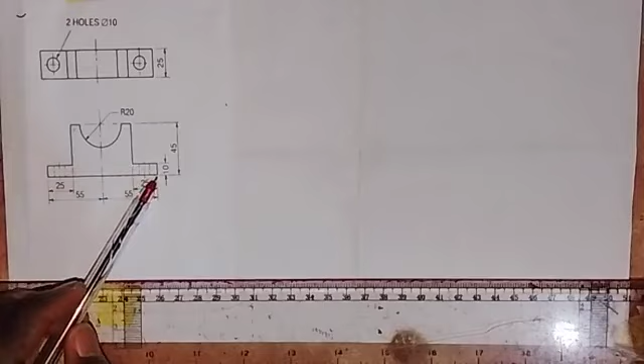This is the front elevation and this is the plan or top view. On the front elevation, the distance from here to here is 25 millimeters, and the distance of this end from the center of the semicircle is 55 millimeters. Also from here to here is 55 millimeters, and from here to here is 25 millimeters. The thickness from here to here is 10, and the height from here to here is 45 millimeters. The radius of this semicircle is 20 millimeters.

Then for the top view or plan, from here to here is 25 millimeters, and the diameter of these two holes is 10 millimeters. We are going to make use of these dimensions to produce the isometric view of this object.

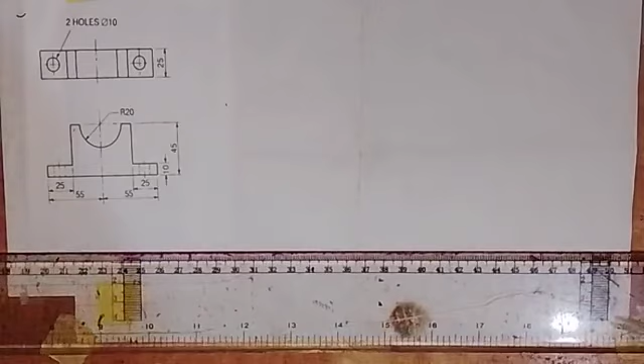Now, the lowest point is not indicated here in the drawing, but I'm going to take this point as the lowest point. So let's go and see how this construction can be done for us to make the isometric view of this object.

So we draw a short horizontal line here. Then I'll take my 30-degree set square, setting it at this point, and draw a line in this direction. I'll draw a line in this direction, and indicate the lowest point. So I'm going to put A at this point here.

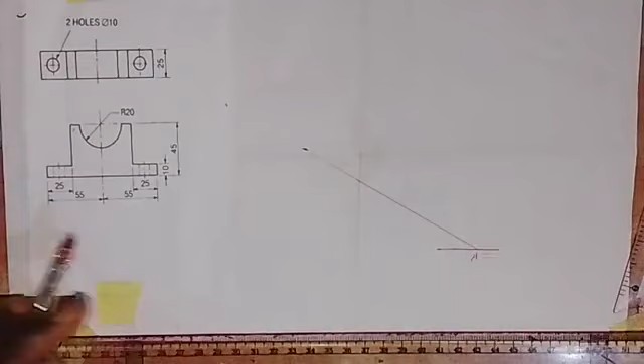So what I want to do first is produce the isometric view of this front elevation. Once you are able to do that, the rest of the object will come out easily, as you're going to see me doing it here.

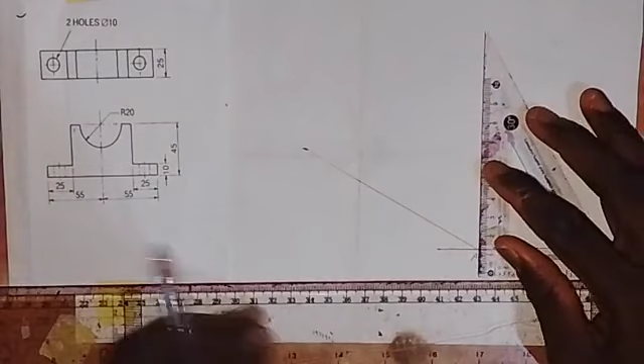Now, at this point A, I'm going to draw a short vertical line. Then I'll take a measurement of 55 millimeters, that is from this point to this center. So from this point, here I have 55 millimeters.

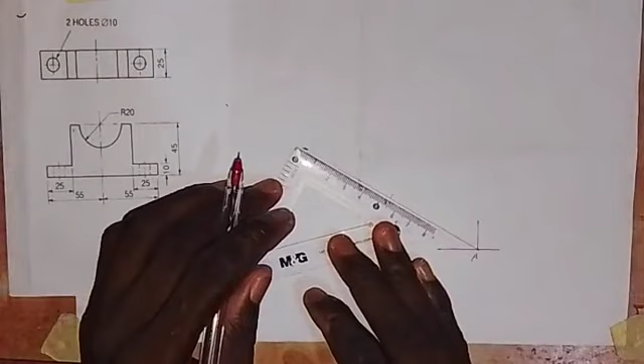Then I will move from here also and take a measurement of 55 millimeters. So this is 55 millimeters. At this point, I'm going to erect a vertical line. This particular one is a center line as we see it in the given view. While here, I'm going to draw a short vertical line.

Then again, I'm going to take a measurement of 25 millimeters that we have here, and also 25 millimeters here. So I come to this point and take a measurement of 25 millimeters from this point to this side - that's 25 millimeters. I'll come to this end here and also take 25 millimeters to this side - that's 25 millimeters here.

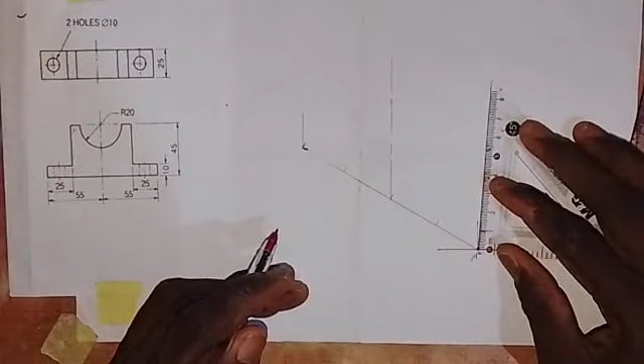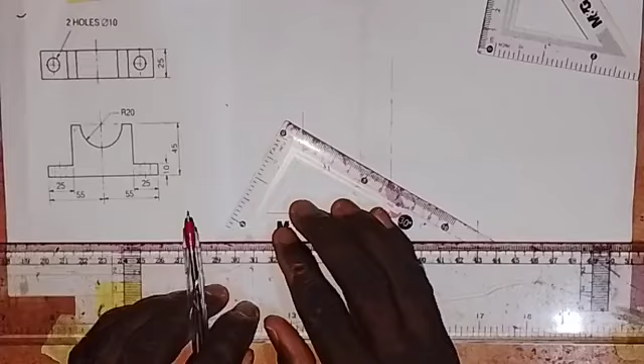Then on this line, I will take a measurement of 10 millimeters, that's the thickness from here to here. So this is 10 millimeters. I'll come to this point, or first draw this line of 10 millimeters in this direction, and with the same 30-degree set square, come to this end and draw a line in this direction.

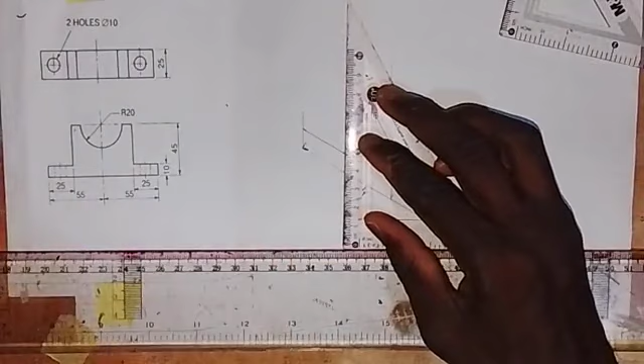Then I need to extend this one a little bit forward. Then from this point, I'm going to draw a vertical line - not from here, but taking it from this line up. And I'll come to this point also and draw a vertical line up like this. Okay, we have this now.

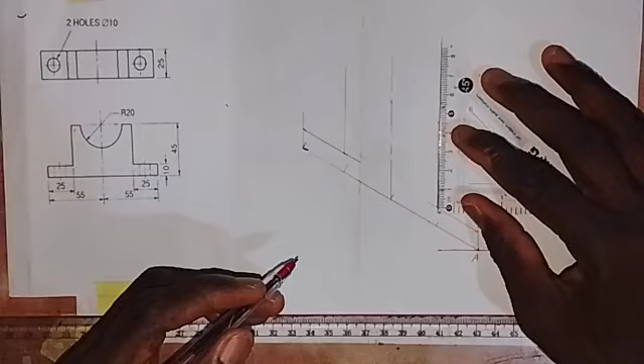So the next thing we are going to do is take a measurement - from here to here is 10, which we have already taken. Then if we subtract 10 from 45, the balance is 35. So I will take a measurement of 35 millimeters from this point up - this is 35 millimeters. Then I'm going to draw a line from here, a center line.

So from this point where we have taken that 35, I'll draw a center line to this side like this. All right, so we have this now.

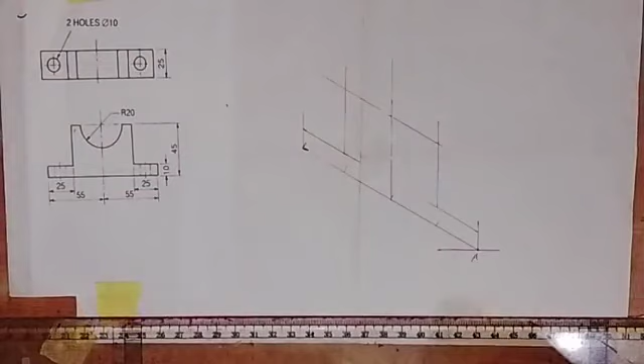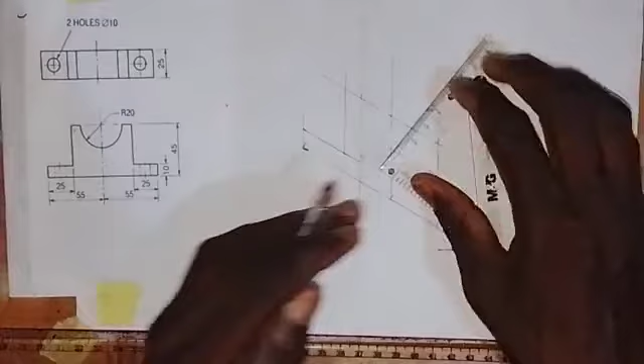Now we are going to create this semicircle here on this face, and the radius is 20. So we are going to take a measurement of 20 millimeters from this center, taking 20 millimeters to the left side and 20 millimeters to the right side, making 40. Then I will come here at this center, setting my ruler like this, take 20 millimeters down, and then take 20 millimeters up.

So on this face, I'm going to create an isometric square so that I can bring out this semicircle. I'm going to draw a line from this point to this side, then come up here and also draw a line with the 30 degree set square in this direction. Then from this point here, where we have this 20, I'm going to erect a vertical line, and also draw a vertical line here like this.

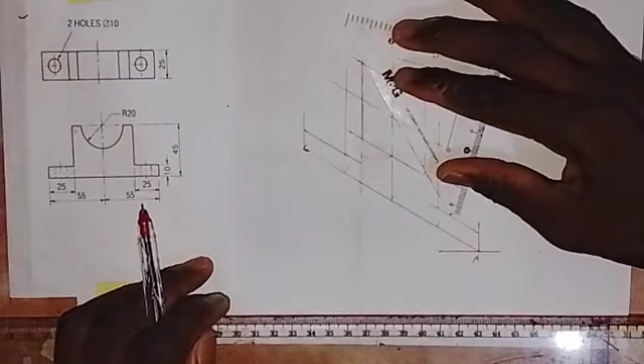So with what we have here, we are going to join the longest corners together with a straight line like this. So we join them together, and now we have this.

Then the next thing that I'm going to do is draw a line from this point, connecting this point to this point together like this. Okay, so we have this. So this is all that I need to do.

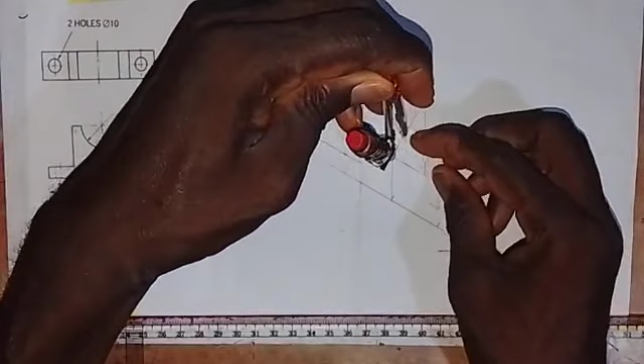So for this, I'm making use of this point. I will take my compass, putting the pinpoint at this point, and extending the pen point to this point here. Then I will gently draw an arc, making sure to take my time to get this done. So we have drawn a part of it.

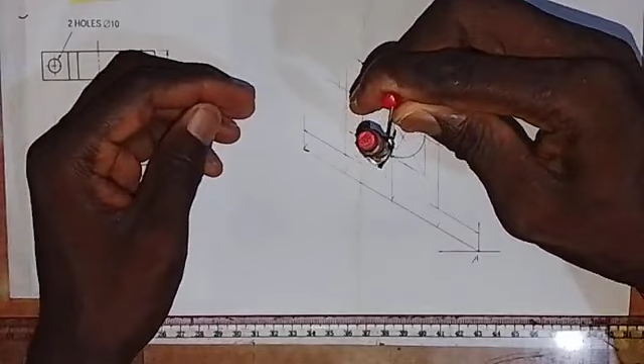And then the next thing we are going to do is put the compass point at this point, and extend it to this point here. Then we are going to draw the arc, going from here to here. So we have this.

All right, so you can see what we have done here. So looking at what we have, we already have it here now. So what we are going to do now is get the other part of the isometric block, for us to make it fully isometric.

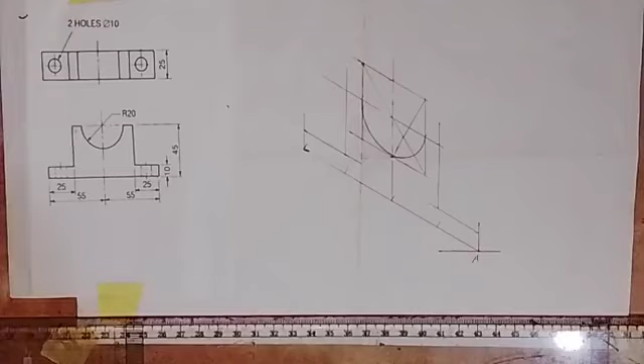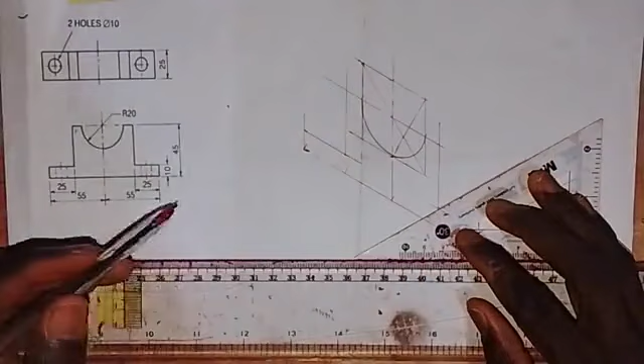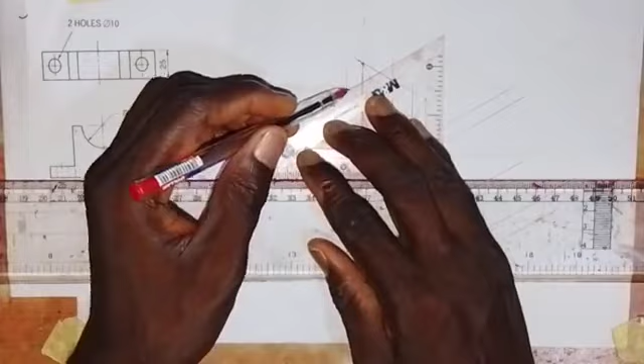So with my 30 degree set square, I'm going to draw a line from this point in this direction, and also from this point we draw a line in this direction. Then I will come to this point and also draw a line in this direction, and coming up here at this point I will draw a line to this side. Then at this point also I will draw a line in this direction, and at this point I will draw a line in this direction. At this point I will draw a line to this side, and at this point also I will draw a line so that it will touch this.

Then the next thing we are going to do, as we have from here to here to be 25, I will come here and take a measurement of 25 millimeters. So this is 25 millimeters here.

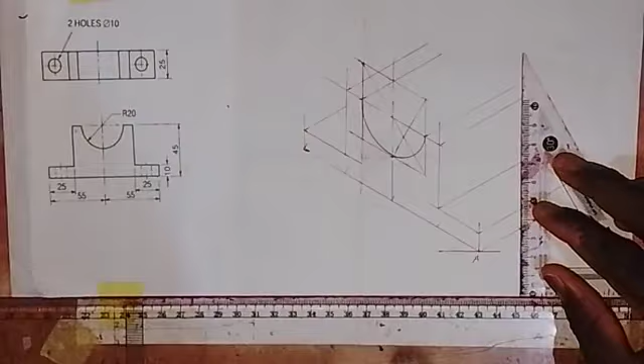So at this point here, I'm going to draw a vertical line to touch this line. Then I will turn it like this. From this point I will draw a line to touch this line. Then at this point here I will draw a vertical line to touch this line, and at this point I will also draw a line from this point.

From this point here I will draw a line to touch this line. I'll leave this for now. Then coming here also, with this same distance, I just transfer it here to touch this. That is what we are going to have.

So what we need to do now is produce this same semicircle that we have here. We also have it at this end, so we need to work that out. This is what I'm going to do, and I'm not going to be using a compass for that.

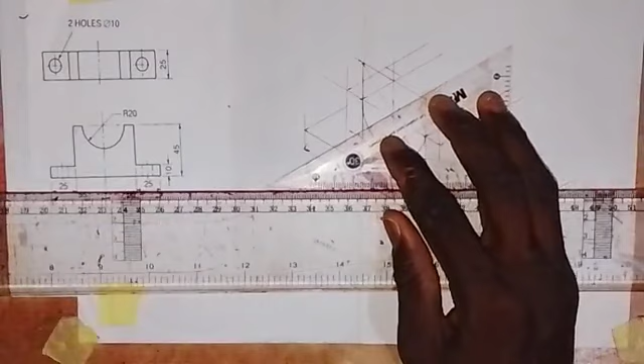So what I'll do is take some set of points on this curve. From this point here I'm going to draw a line in this direction. Coming to this point, I'll draw a line in this direction too. Then from this center here, I will also draw a line so it coincides with this. I'll just leave it like that.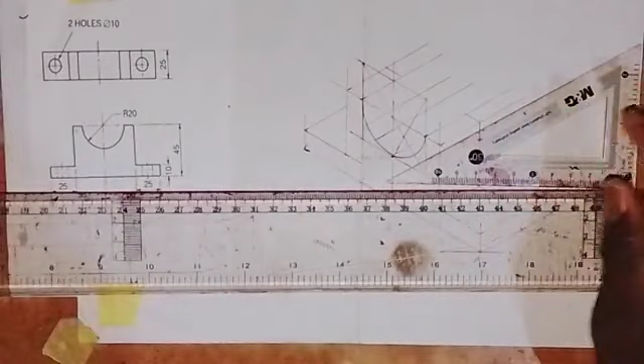Now we have that the distance from here to here is 25. So as we have that from here to here is 25, that means the thickness of the semicircle or the curve is also 25.

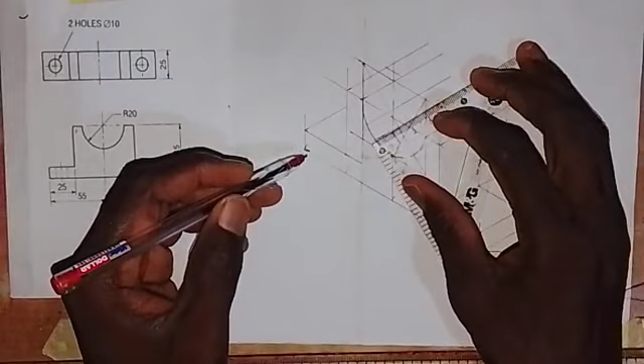So what I will do is take a measurement. I'll come to this point here. We already have 25 here, but I'll come to this center line and take a measurement of 25 millimeters from this point to this side. So this is 25 millimeters here.

Then I will come onto this line from this point on the curve. I will also take 25 millimeters. So this is 25 millimeters. So we have this point, which is 25 millimeters here. Then we also have this point.

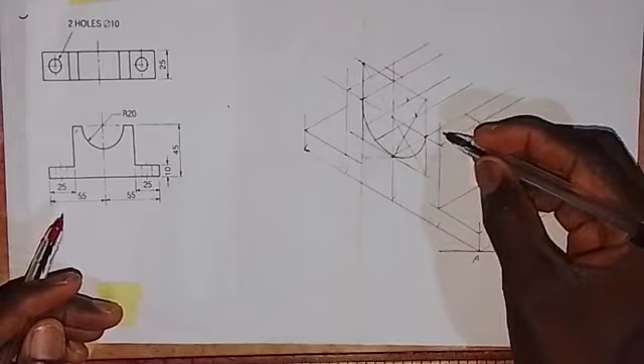Looking at this, if I take 25 from this line, from this point on the center, so I have 25 here, this is 25. We are connecting it with this point - that's what I want to bring out. We are connecting everything to this point.

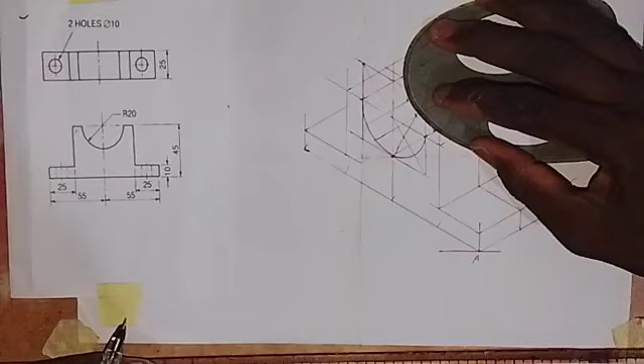So you can see that the curve is already out. You can see how it is. This is the curve. You can see it.

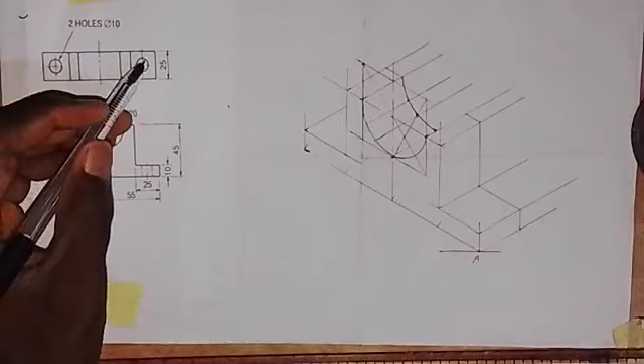So with what we have done here, we only need to produce this hole and this hole. Let's see if this particular one will show, because this one is going to be here, while this particular one is going to be around here. Let's see if it will show.

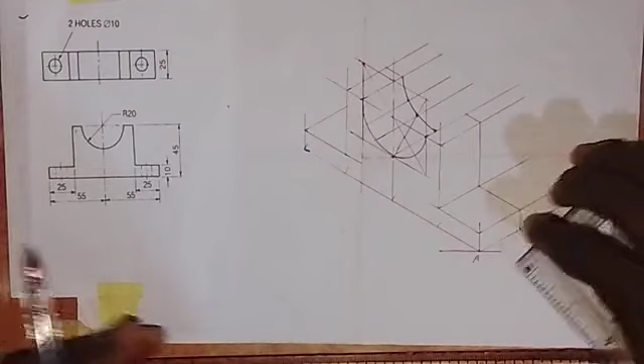So we are breaking this 25 into two, that is 12.5 millimeters. So I'm going to do that. I will take from this point here 12.5 millimeters - that is what that distance is going to be.

So with my 30-degree set square, I'm going to transfer this distance. I'll transfer it to this end here. I'll come here and transfer it from here. So draw a line like this.

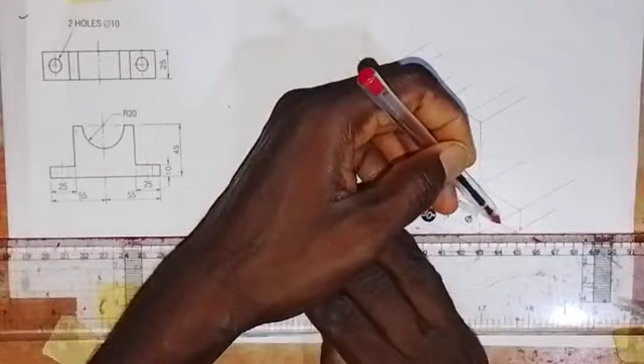Center line here, I'll come here and also draw a center line, so it's also in the middle of this distance. We also take 12.5 from here. So from this point here, I have this to be 12.5.

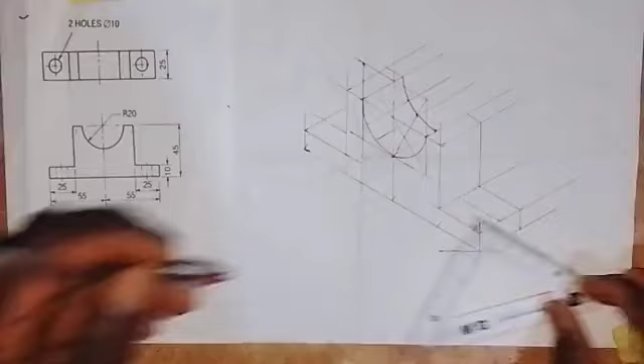So I'm going to transfer that distance. So here we have this to be from here. We transfer this, so 12.5. And also I will come to this end and take a measurement of 12.5 from this end. So this is 12.5.

So here we have 12.5. I'll transfer it to that side, so I'll just come here. Okay, so I'm looking at this particular one - it may not really show. It goes like this, so it's not going to show, or maybe a little part of it should. Let's see.

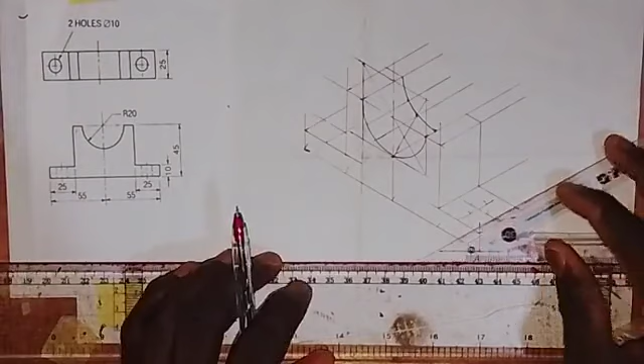So what we have to do now, as the diameter is 10, we have to create an isometric square of length 10 millimeters. So take 5 up and 5 down from the center here. Then on this side I'll also take 5 from this center. Take 5 to this side, then 5 here. So here we have 5. Now I'm going to form an isometric square by drawing lines. So here like this, and I'll also come here and draw a line like this. Then from here I'll draw a line from here to here, and here also from here to here.

So if you look at what we have here, it's going to be a very small isometric circle. In this case, I will use my hand to do it, just to connect these two points together like this. When the circle has a small radius like 5, it may not be easy to draw with a compass. So you can see I formed the isometric circle - this is how it will look. It's very simple to do.

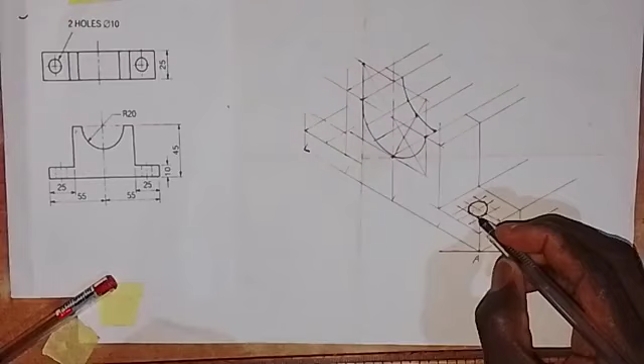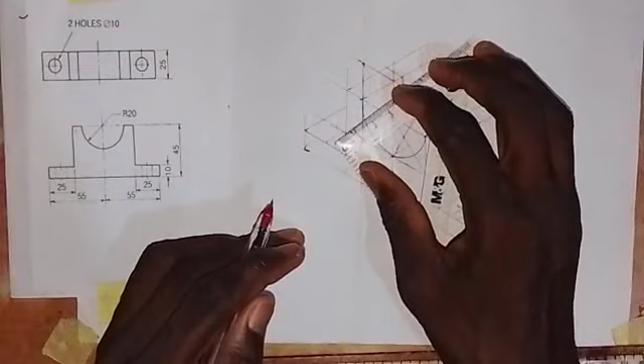All right, so we have this. Let us also look at it on this side. If we are going to see a part of it, from this center point I have to take 5 to this side - this is 5 millimeters. And also on this side, from this point I will take 5 to this side. So we'll just see a little part of it.

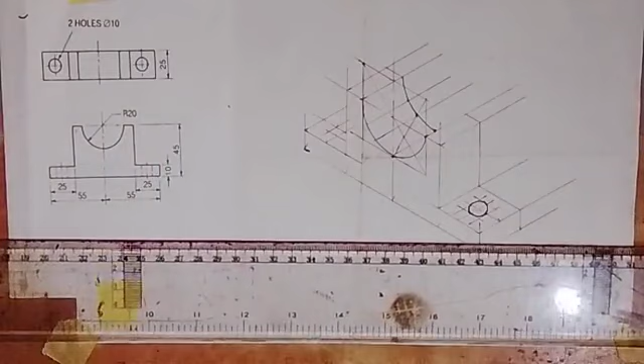So from this point here I'm going to draw a line from here to here. And also I will draw a line from here to here. So we just see a little part of it. Then we still need to take 5 to this side - so this is 5. Just touch the line. All right, so we have this now.

So what I'm going to do is just draw a little part of the circle - we go like this, then it goes like this, so it will touch this line. And then this one will go like this and also touch this line. So this is the little part that we are going to see on this hole.

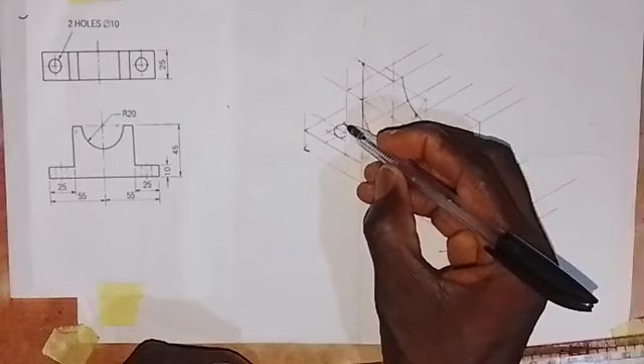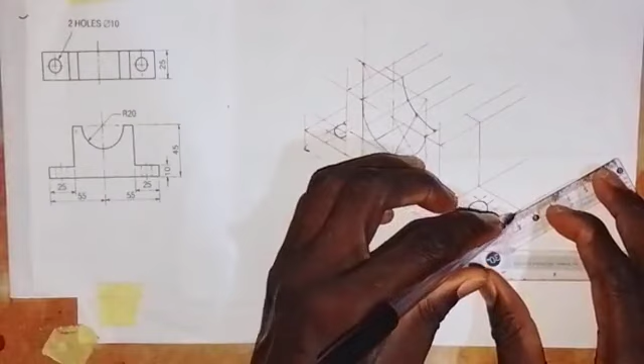So for this particular hole, we have completed it, but not yet done. We need to bring out the thickness of some parts of this object - the visible outlines. So we make this line a thick line, and also this line a thick line. Then this line here too, a thick line. This line, make it a thick line like this, and this line also. Coming here, this line is a thick line, and this line also is a thick line from here to here. Then this line also we need to make a thick line from here to here.

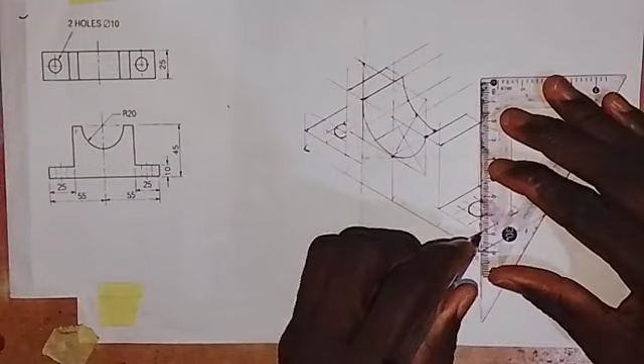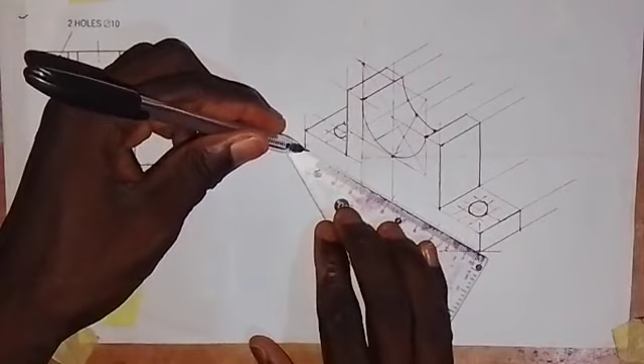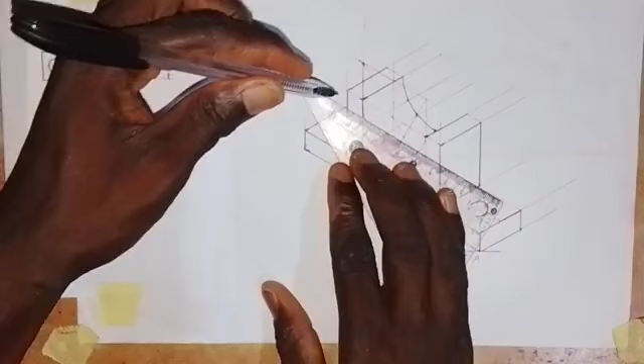Then let's work on the vertical ones. This is a thick line, and this also is a thick line from here to here. Then we also make this a thick line from here down. We have this, and this also as a thick line. Coming to this end here, we make this line a thick line from here down, and here we also make this a thick line. Then on this side, the whole of this line from this end to this point is a thick line from here to here. For this one, make it a thick line from here to here, and this also a thick line from here to here. Then coming up here, we have this line to be a thick line from here to here, and this also a thick line.

Then this line also, make it visible, and then these two lines here, make this a thick line from here to here, and also make this a thick line from here to here. All right, so this is how the isometric view of this object will look. It's very simple - all you have to do is practice. When you practice this, you will be able to do more.